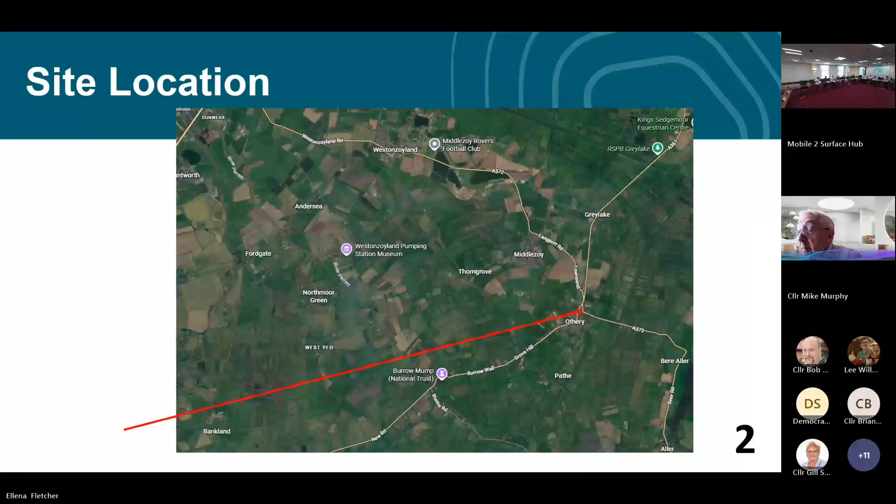So this shows the site location plan, with the site outlined in red. We're on the northern edge of the village.

The proposal extends into two fields, one of which was previously partly developed to provide an affordable housing scheme some 10 years ago, known as Peppard's Close. We've got existing residential development on the southern or western sides, and an existing farm complex on the northern side.

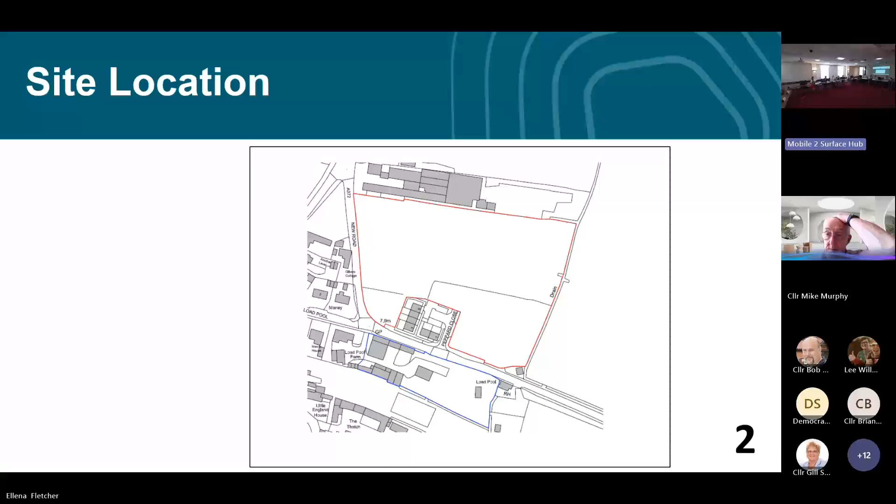This is an outline application with all matters reserved except for access. So this is just an illustrative layout plan, not fixed, just to give an indication of how the proposed development could be accommodated on the site. Access is a matter we are looking to determine at this stage, and it's proposed on the western boundary of the site onto New Road.

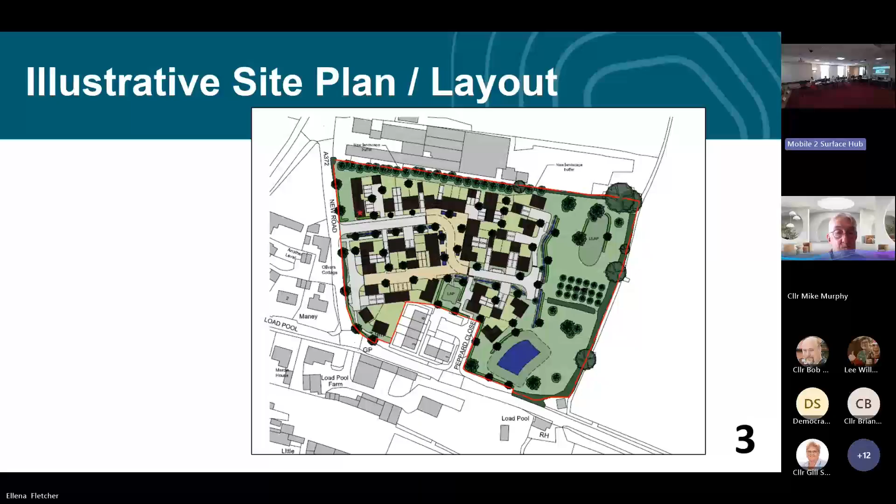As part of this application, footway connections into Peppard's Close are to be secured, and some of the land on the eastern edge of the site falls within an area of high flood risk, so that would be looking to contain drainage features and some of the proposed open space.

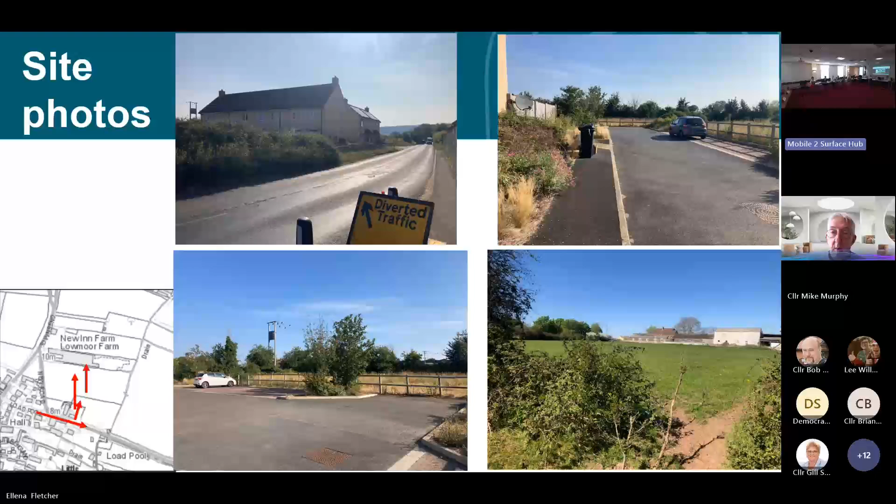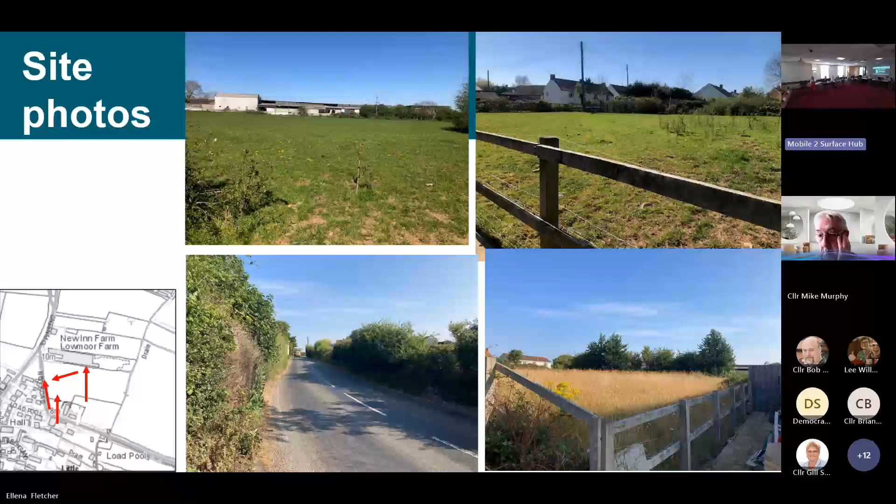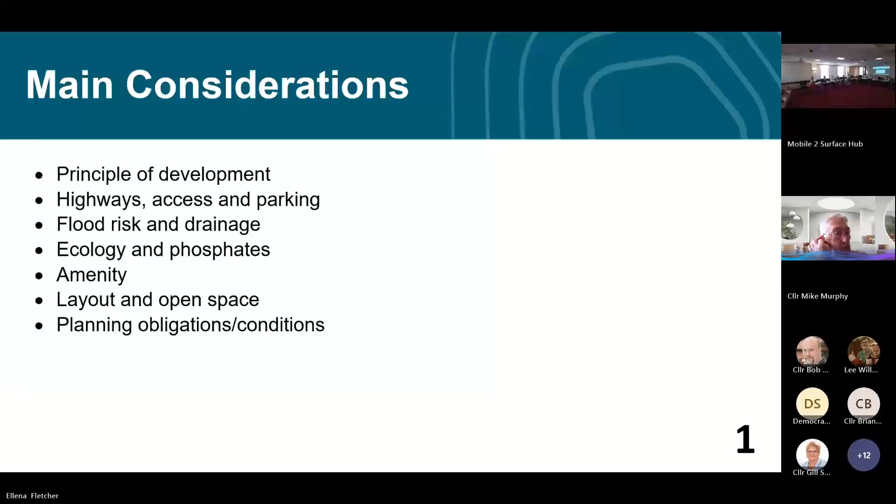In terms of principle of development, so Othery in the Sedgemoor Local Plan is designated as a tier 4 village. This is a site outside the settlement boundary for Othery, but lies adjacent to it. The relevant policy, T4, says that schemes for affordable housing can be acceptable where there is evidence of local need in such locations - that's the standard policy basis when looking at tier 4 villages.

That's predicated on there being a housing need, and in this case there is an up-to-date housing needs assessment from 2024 that identified a need for 12 affordable rented units. Home finder data from 2026, and more up-to-date data that our affordable housing colleagues have extracted from the system, indicates that need is now increased to 22 households. In addition, they consider there to be a likely additional need for intermediate housing - things like shared ownership housing products.

So this scheme will provide 40% affordable housing, equating to 16 units, which will make a meaningful contribution to meeting that local need identified through the housing needs survey and on the home finder register.

In terms of the policy position, the policy allows affordable housing schemes to come forward, and they can be cross-subsidised by market housing where justified by viability evidence - that's the standard process for tier 4 villages. We're not in that scenario here; we haven't had such evidence submitted. In that regard, there is some conflict with the policy because that's what the policy requires.

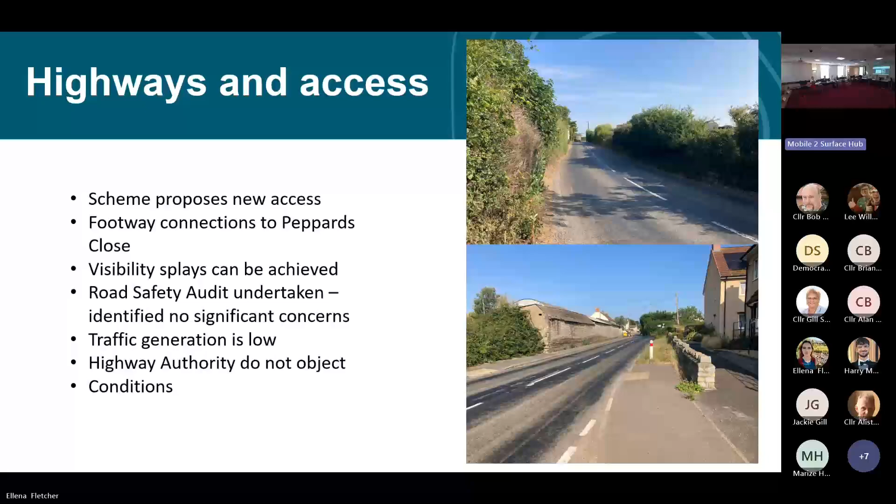They are seeking conditions to secure the footways I've mentioned in terms of that internal connection, visibility splays, drainage, estate roads and construction management to manage the effects of the development, and the need for a Section 106 agreement to secure a travel plan. Now, subject to those measures, we consider the proposal delivers a safe means of access for all users and is considered policy compliant.

Statutory consultees have had detailed input on the application, including the Environment Agency, Drainage Board and Lead Local Flood Authority, and they are not raising any objection. So on that ground, subject to securing conditions they've requested, which include that all accommodation must at least have a second storey, specifications about finished floor levels and detailed drainage, there are no objections regarding flood risk and drainage, and we'd consider that part of the scheme acceptable.

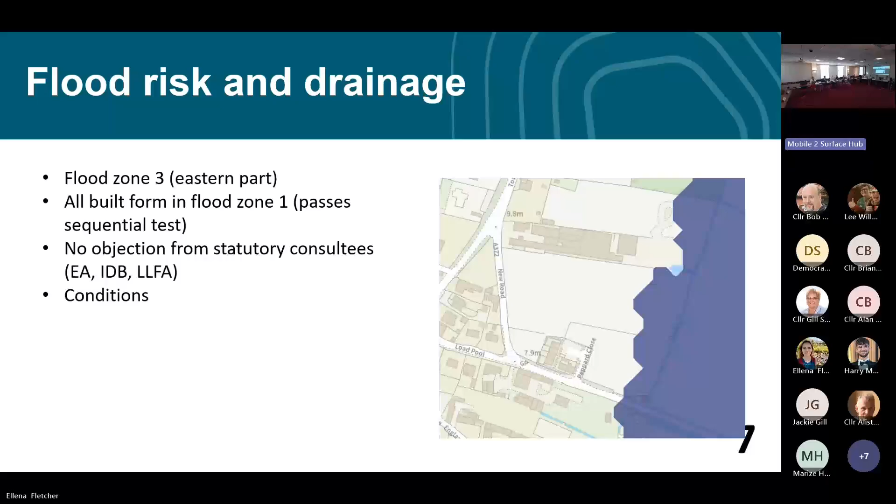Coming on to ecology and phosphate matters, the site does fall within the catchment of the Somerset Levels and Moors Ramsar site, which is affected by phosphate pollution, which members will be very aware of. However, the scheme can connect to the existing mains drains in the locality, which discharge at Chilton Trinity Treatment Works, downstream of the Ramsar site, and therefore impacts on the Ramsar site can be screened out, with no requirement to undertake a habitat regulations assessment.

The scheme's been subject to detailed ecological surveying with lots of input from the Somerset ecologist. It can meet its 10% biodiversity net gain objectives, subject to securing this through a Section 106 agreement, but again, subject to securing the mitigation and conditions proposed, we would consider the scheme to be acceptable in that regard.

I just want to touch on amenity considerations, particularly in terms of noise and odour. The application has been accompanied by assessments.

In regard to noise assessments, that's looked at whether potential local sources of noise, which would be either road noise given it adjoins an A road, and farm noise arising from the agricultural enterprise located on the northern boundary. In terms of road noise, it's identified as low risk category requiring a modest level of intervention in terms of building fabric, so improvements that could be made to mitigate noise arising.

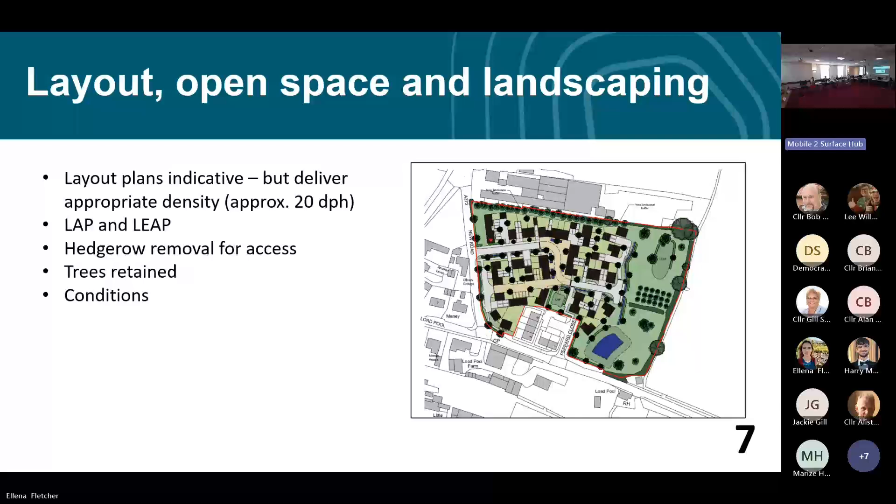So again, the scheme is considered acceptable subject to securing those conditions, securing the obligations for the lap and leap, and the tree protection measures. And then just trying to wrap it up.

In terms of other matters, planning obligations - NHS Somerset recommended a financial contribution towards nearby GP provision. Just wanted to give a quick update on that from what was in the report. We received a revised letter from NHS Somerset; they changed their methodology for the calculation, so the figure quoted in the report is slightly different from what they're actually seeking. It's actually gone up by about 2,000, so instead they're seeking 23,167.

If members are minded to approve, it would be looking for that higher figure, and that's been accepted by the applicant. We will look to secure that through a Section 106 legal agreement. Just in terms of other conditions, I mentioned a local labour agreement condition will also be imposed on the permission given the size of the site.

So in terms of wrapping things up, planning balance and recommendation - there is conflict with the local plan in terms of policy T4. We've got to consider that in the round in terms of the council's inability to demonstrate a 5-year land supply, which is currently at 4.17 years.

Now there is 40% affordable housing proposed, and that does attract substantial weight. We consider the site is well located; it represents a logical extension to the village. It isn't going to extend out into open countryside, given the containment within existing residential development to the south and the agricultural complex to the north.

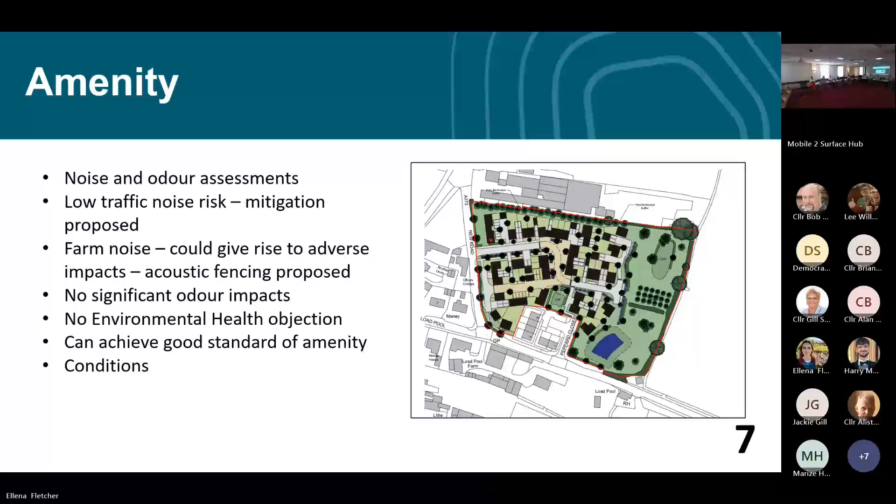So that takes us on to planning applications 5 and 6 for Bridgwater Docks. Agenda item 5 is for the planning application itself, and agenda item 6 is for the listed building consent. But we'll be taking the two together so that we don't have two very similar applications presented.

Okay, thank you. Good morning, everyone. So as introduced, this is a presentation on a full planning application and a listed building consent for a suite of regeneration works at Bridgwater Docks.

Including the change of use of the dock to introduce residential and leisure moorings and associated infrastructure, including new secure entrances and pontoons, creation of an active travel route, replacement of the swing bridge, repairs to the bascule bridge and associated structures, landscaping and public realm works and engineering works within the basin.

So the applications are before committee because the applicant is the council, and that is the only reason.

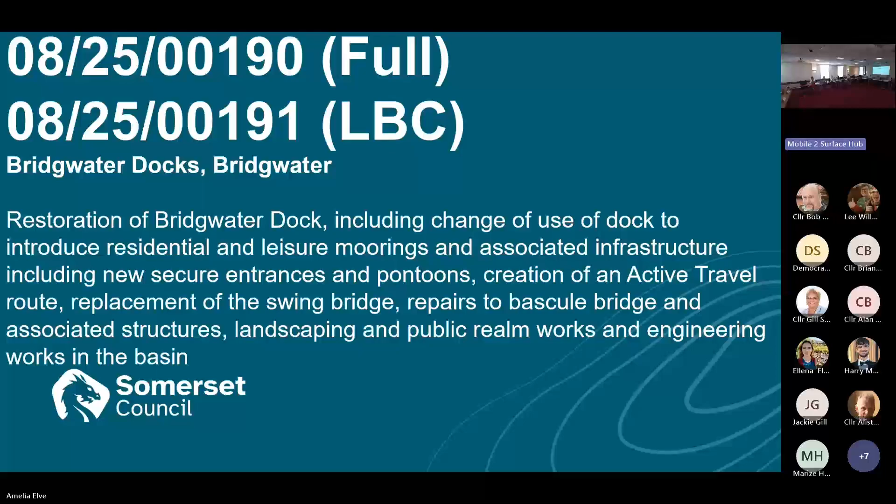Since the publication of the report, there has been an amendment to condition 19 following on from a late response from the Canal and River Trust. They just wanted to ensure—oh, I've just realised it's not loaded on the screen, sorry. I will slow down a bit.

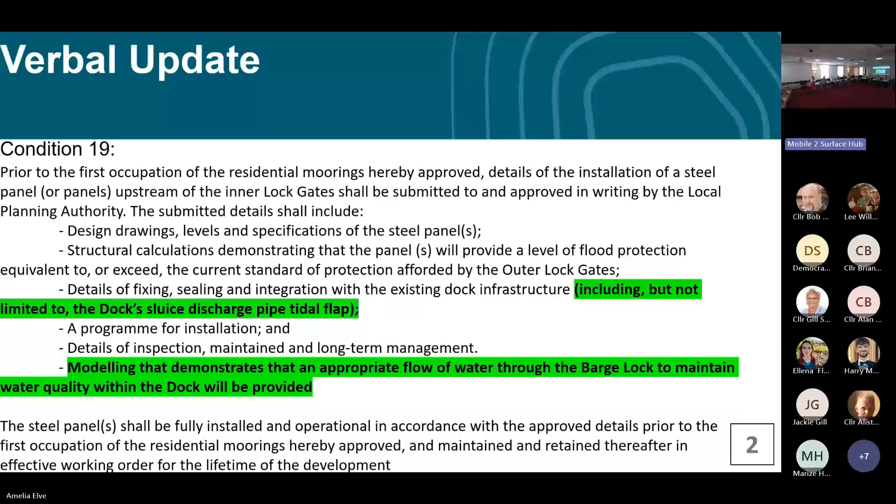So condition 19 is to be updated to reflect the latest response from the Canal and River Trust, and that's just to ensure that the steel plating that would be used as a stop loss strategy, which I will come on to, also includes other measures that meet the satisfaction of the Canal and River Trust, as well as the Environment Agency, who had originally requested this condition.

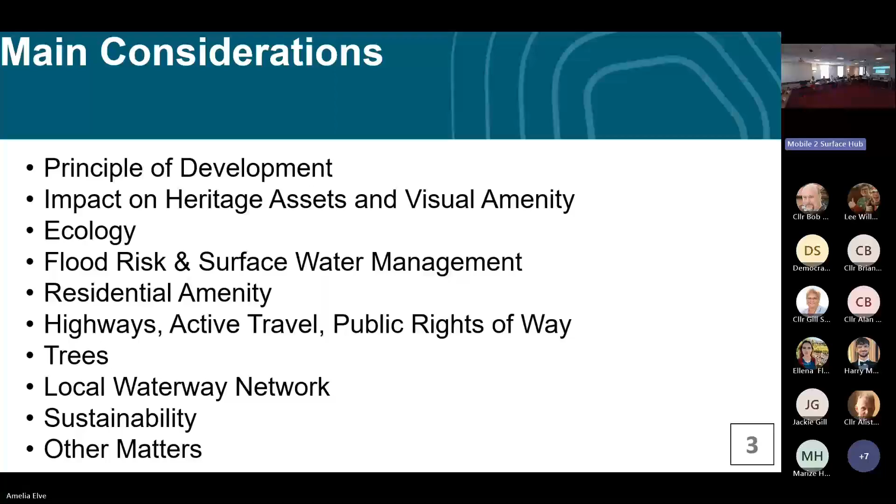The different additional document for this one is the Bridgwater Vision 2015, which is specific to regeneration works that are within Bridgwater, such as the Celebration Mile, which is the route from the docks down to the train station.

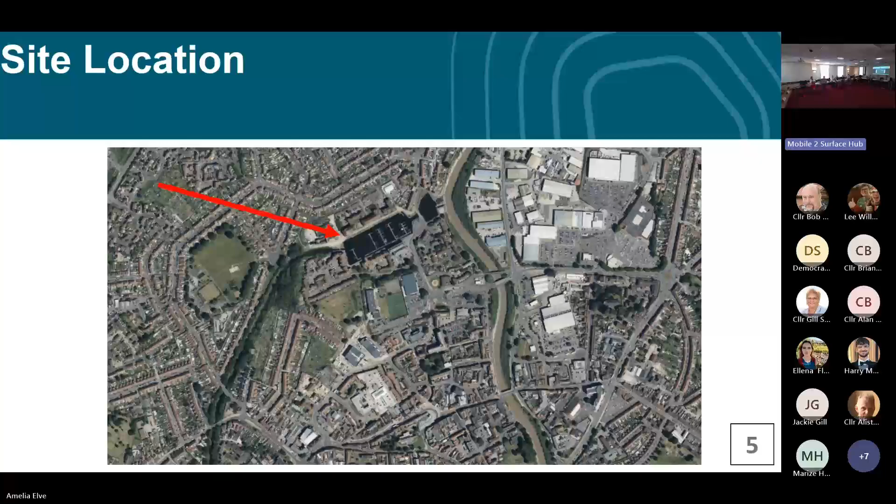The north, south and west sides of the dock are fronted by modern residential apartments with a historic warehouse on the south side that has been converted to a pub, Admiral's Landing, at ground floor.

The site extends to approximately 2 hectares and includes the Bridgwater Dock, a small section of the Newton Lock, which is the bit that you walk over just in front of Bowering's Mill, and the Sea Lock, which is to the right on that drawing.

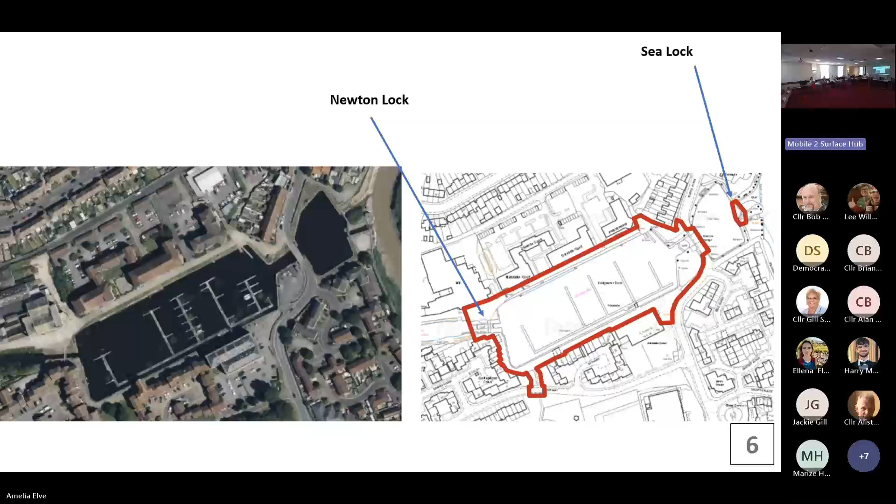So the scheme was presented to Quality Review Panel back in August as part of pre-application discussions. The key comments made by the panel identified that this is a major opportunity with potential to generate significant public benefit, that there's been a good engagement strategy undertaken by the applicant team, and that a strong council-backed vision is needed to identify priorities and choices for wider public benefit.

The restoration of the moorings and swing bridge should be prioritised as these can generate income. Public realm improvements should be focused on key entrance areas because obviously there's a budget, so it's about where to target the best bits.

And brick would be a preferred material with selected areas delivered at a higher quality type of material, to reflect the industrial heritage of the site and the wider Bridgwater industrial heritage.

So I've done it a bit different this time. I've done pictures and then plans to show what is proposed for that section of the site, because as you can appreciate, it's quite a large site.

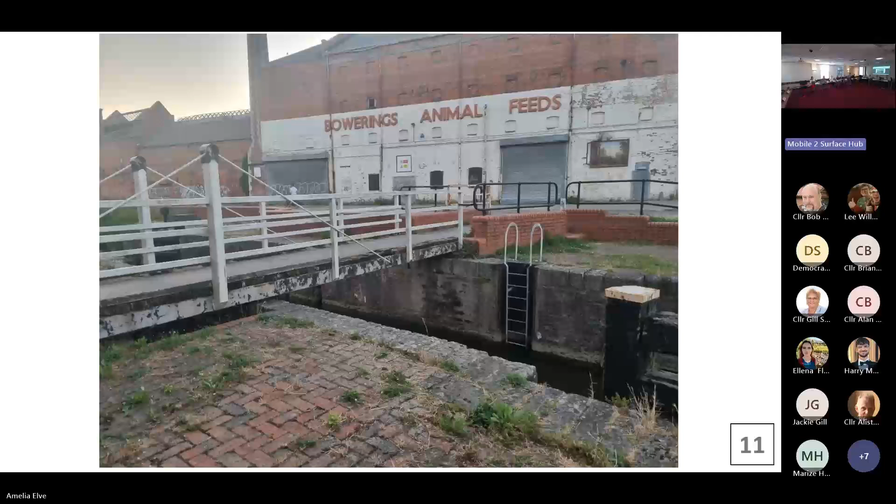Currently this bridge, for those of you who are local, when you walk on it, it moves down and it's quite narrow. This is the bridge that is proposed to be replaced.

So for that section of the docks, which I've effectively walked you through, this plan shows the proposed works for that section, from the crossing with Anson Way to the south, along the western and northern edges of the docks.

The proposal sets out that as you enter the docks from the footway, there's a new seating area. It's quite hard to see on these plans because they're so detailed, but these little brown rectangles are effectively new seating areas, and the cast iron wheels will be relocated as well. The blue asterisk indicates the siting of a gateway feature, such as an artistic sign or sculptural feature - details of that are yet to come forward, so it's just indicating where that could go in the future.

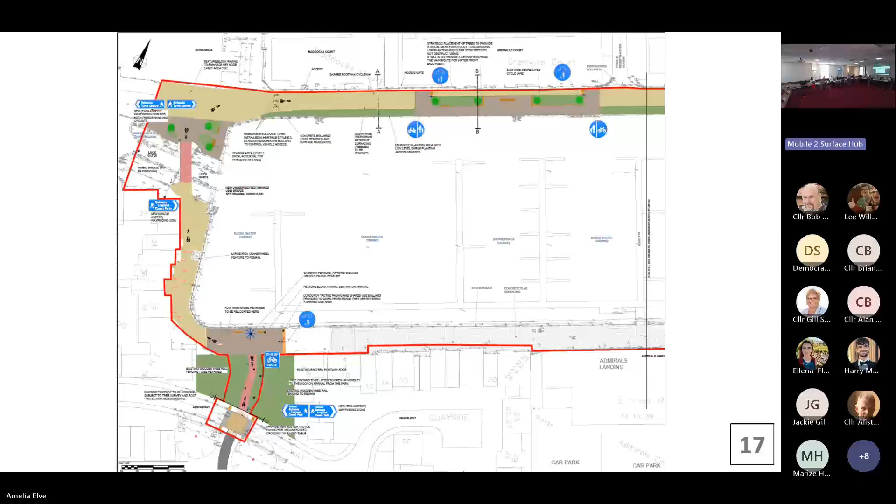So this is a more zoomed in plan of the widened footpath. This orange section shows where it would be widened to. A cell web material is proposed under the surface to ensure that the tree roots are protected, and this proposed methodology has been reviewed by the arboricultural officer, who is satisfied with this approach.

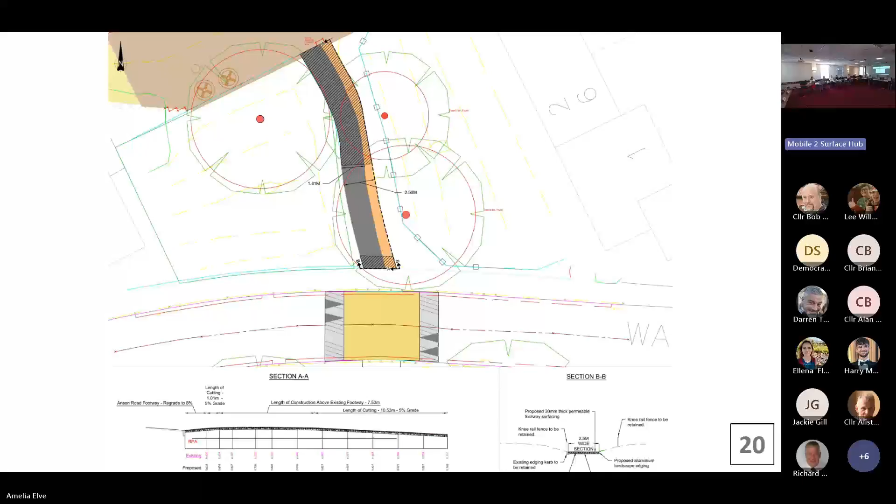So these plans show in more detail the proposed replacement swing bridge. The proposal would have a 3.5 metre wide deck to allow better access for both pedestrians and cyclists. I don't know if anyone here has walked along the swing bridge, but at the moment you effectively have to let people go one at a time, and it's quite awkward.

And also the condition of the bridge isn't great, so the works are there to not just improve access, but also repair effectively what is currently there. It's quite similar in appearance to what's currently there.

So the proposal includes the heritage style railings to the edges, and this has been reviewed by the conservation officer, who is satisfied that these plans are acceptable. There's quite a number of conditions to secure the finer details of these materials because of the historic environment, and there's quite a lot of protected heritage assets in this area, but again, we'll come on to that later.

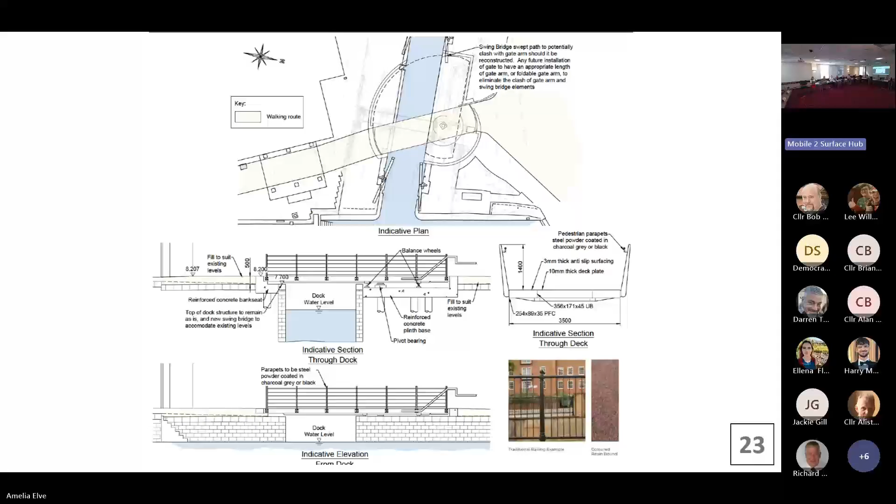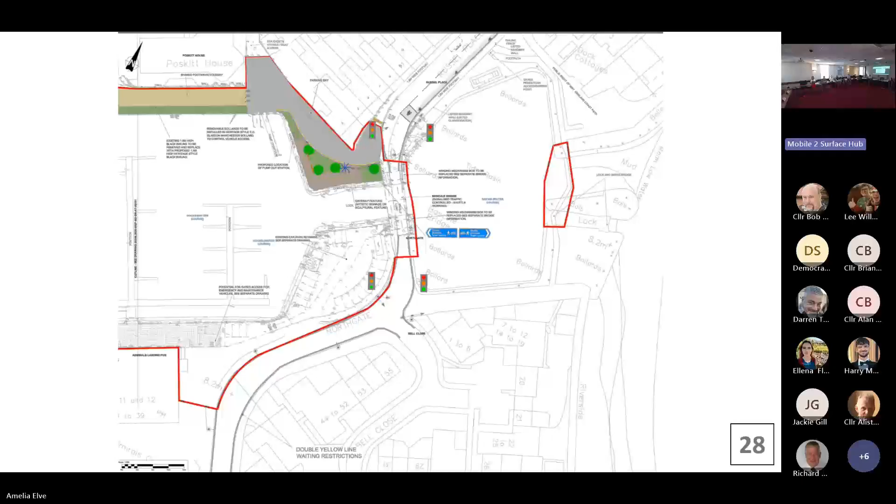So the winding mechanisms are proposed to be covered with glazing to allow for viewing, and there would also be a continuation of replacement black railing with the 1.4 metre high heritage style, along with refurbishment works to the Bascule Bridge.

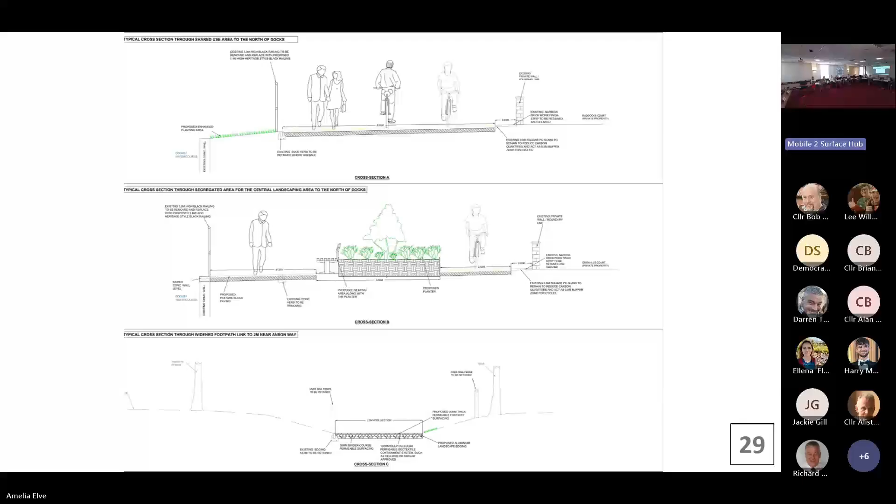Another reason is that the planting has to be provided a certain distance from the edge of the docks, to prevent roots from impacting the structural integrity. The LLFA requested that, and they're now happy with where the planting is shown.

So we move on to the pontoons. These are effective T-shaped structures, and the scheme seeks to reinstate one of these T-shaped structures that's been removed historically. Previously, those local to Bridgwater will know the docks were used to allow for houseboat moorings. So the scheme is changing the use of the docks to allow for residential and leisure moorings, which provides an economic benefit as well.

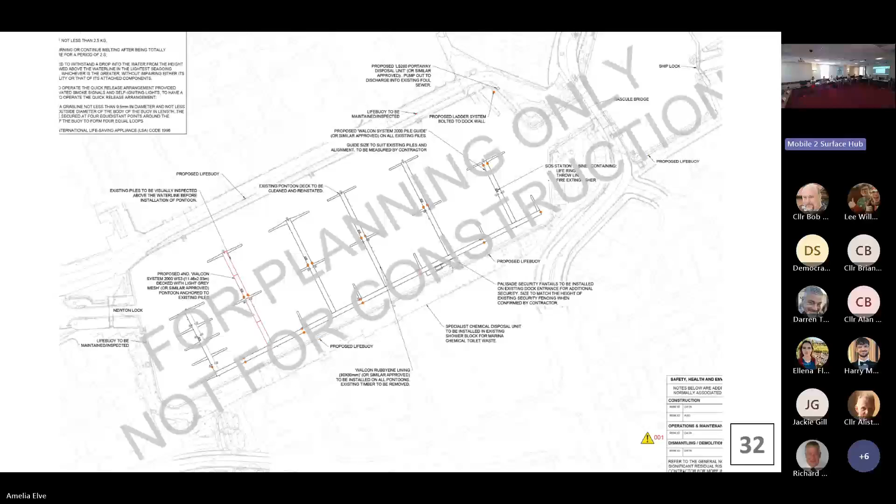Just another view of the pontoon. This plan shows which bits - it's quite hard to see, but this red section here is to be replaced, reinstated, sorry, as currently it's missing. There are just these piles at the moment standing out of the water, and historically there was a pontoon here, so this isn't new in that sense, it's just been missing for a considerable period of time. The existing pontoons are to remain in situ, so nothing is proposed to extend these, but they would be refurbished.

Once you've gone over the Bascule Bridge and look to your right, looking west, there's the Admiral Landing pub, this existing parking area, and this is the area proposed to have waste storage and cycle storage facilities to serve the boats. This is shown on this plan - the orange block is the bike shelter, and these multicoloured boxes are different recycling and waste facilities.

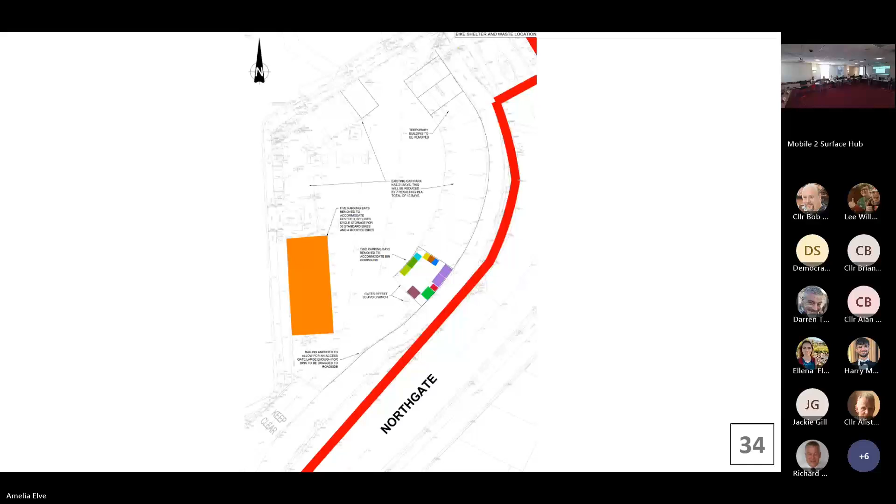Okay, so that's it for photos. We move on to the considerations of the scheme, first of all the principle of development. The Bridgwater vision, as previously highlighted, sets out specific projects required in order for the ambitions of the vision to be achieved, and project 3 within this vision focuses on the Docks Renaissance - that's the title given within this document.

Additionally, whilst not part of this application, the site is connected by pedestrian links to the brewery field and then the Northgate Yard scheme that was recently redeveloped to the cinema complex, and these are also identified projects within the vision. So what I'm trying to get across is that the docks form part of the wider regeneration aim of the town.

Furthermore, policy B18 of the local plan states that development proposals in the town centre will be supported that deliver high quality public realm improvements, whilst taking into account important views of and to landmarks, and integrate the town centre with the wider town through improved connections and linkages. The docks are not strictly within the town centre boundary - they're 9 metres from it - but they are considered well related, and given the works relate to public realm improvements to an important landmark and seek to improve connections to and from the town centre, it's considered B18 is a relevant policy when assessing this application.

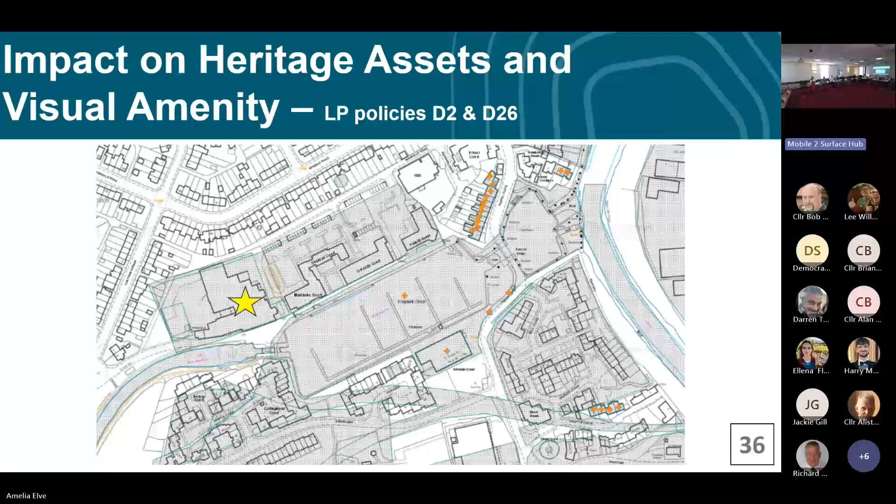Historic England were consulted on the application and stated they were offering no advice, defaulting effectively to the council's conservation officer. Initially, the conservation officer wanted further information, due to concerns regarding a lack of clarity on the proposals because there were a few errors between the drawings that didn't match up. Following the submission of this additional information, the conservation officer is satisfied that the proposals would not in principle cause harm to the significance of the heritage asset, and that appropriate conditions could be used to secure suitable mitigation, such as a method statement, schedule of works, and details of fixtures and materials.

Considering archaeology, South West Heritage have raised no objection and have recommended a condition to secure a programme of works with a written scheme of investigation.

Moving on to other considerations of visual amenity: landscape and placemaking initially again requested additional clarification and amendments, similar to the conservation officer. Following submission of these revised details, she was satisfied that conditions can be used to secure a hard and soft landscaping strategy, details of materials and street furniture and fixtures - similar to the conditions requested by the conservation officer.

Moving on to ecology: the application site is within the buffer zone of 2 county wildlife sites. The buffer zone is a relevant constraint when considering major developments.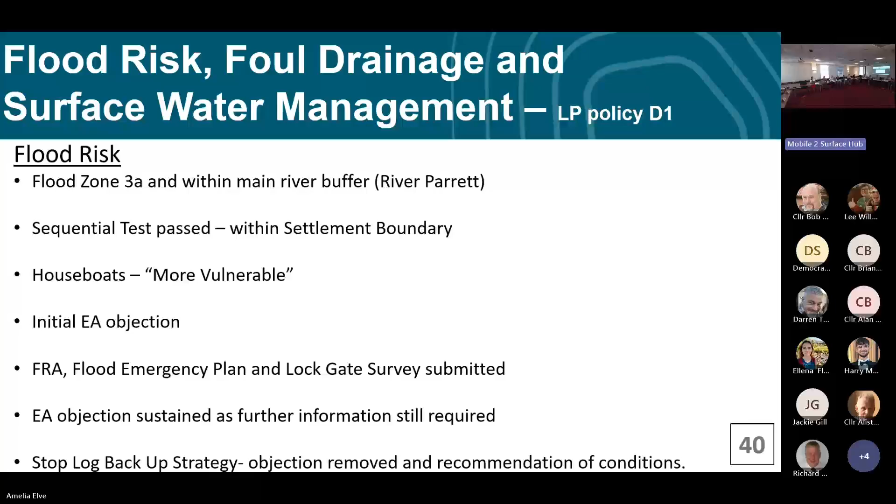In response to this, a stop log backup strategy was proposed. This relates to condition 19 that I provided a verbal update on at the beginning of the presentation. A strategy has been submitted, and effectively this would introduce a steel plate adjacent to the lock gates to ensure that in the event of failure, there is effectively a backup delivered by this steel panel. The strategy has been submitted and accepted by the Environment Agency, with the recommendation of condition 19 as you saw at the beginning of the presentation, and that has also been amended to reflect the needs of the Canal and River Trust.

Moving on to foul drainage. There's been a number of concerns raised by third parties regarding potential impacts if this isn't suitably managed for the proposed moorings. The scheme includes a foul water drainage plan, which indicates that a pump out facility is proposed at the northeast corner of the docks, with a proposed new connection to a chamber on the existing foul water pipe, with the connecting pipe from the new facility and other relevant details to be agreed with Wessex Water.

The Environment Agency have also commented on foul drainage and advised that they have not identified any issues with the proposal, and that the connection to the foul sewer is subject to agreement with Wessex Water. An informative has also been provided to remind the applicant to engage with Wessex Water. The scheme also includes a provision of a specialist chemical disposal unit within the existing marina shower block for chemical toilet waste. It's therefore considered that the scheme is acceptable in respect of foul drainage, with a proposed condition to secure a suitable foul drainage connection prior to the occupation of the residential moorings.

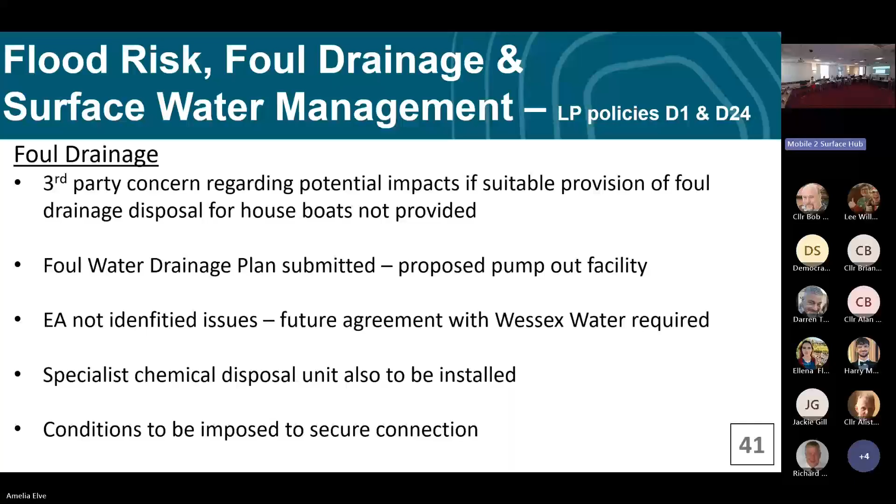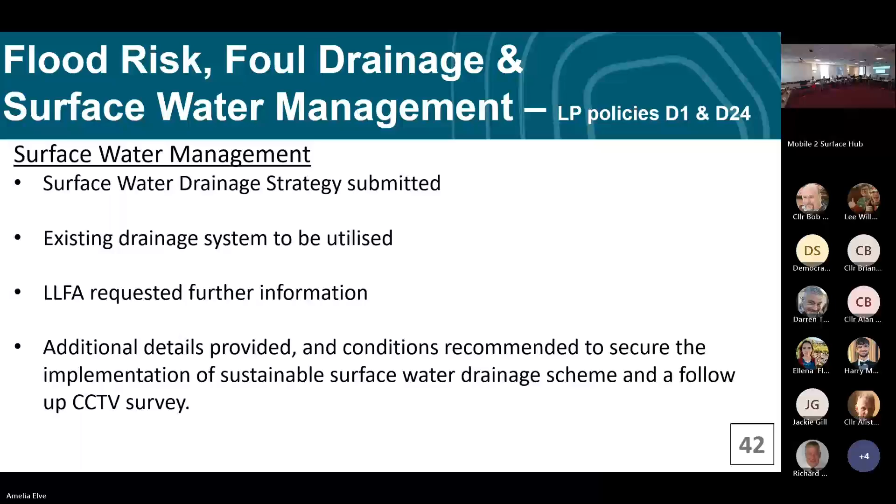Surface water management: a surface water drainage strategy has been submitted, setting out that the proposals do not impose a meaningful increase of the impermeable area, because you're effectively replacing, not quite like for like since they are different materials, hard standing with different hard standing. The works would connect to the existing drainage system with overland flow routes to the docks in the event of exceedance. Initially the LLFA wanted further information, and this has been provided, and they're now satisfied, recommending appropriate conditions to secure the drainage scheme, and a CCTV survey to demonstrate that the existing drainage systems are of an acceptable standard to allow for suitable drainage.

Environmental health have also been consulted on the scheme, raising no objection, recommending suitable conditions to secure a CEMP to protect residents during the construction phase of the scheme, appropriate lighting to ensure that lights aren't directed towards residential properties, and also the standard land contamination reporting condition.

In respect of the amenities of future residents, so those that may wish to take up the moorings, the scheme is considered to be in a sustainable location, an appropriate distance from local amenities, and therefore is considered to be an acceptable place to support a good level of amenity for future occupiers.

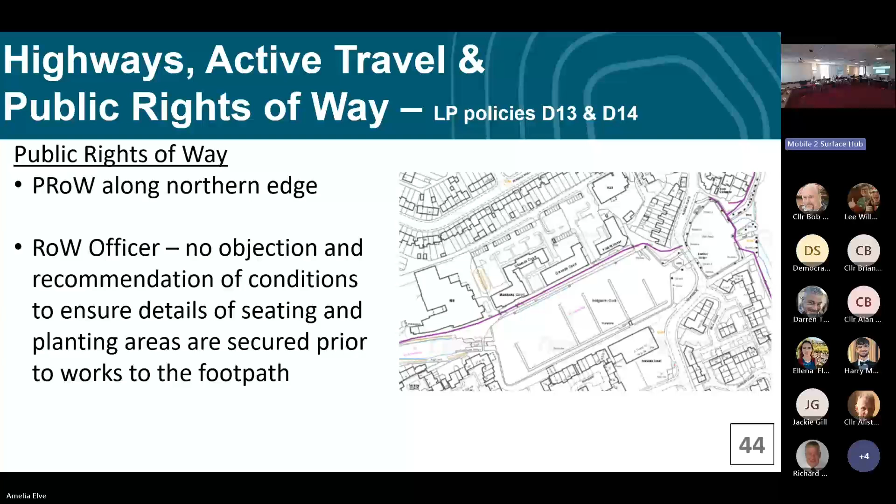Moving on to highways - appreciate it's not a car scheme, but highways still need to be involved because of the types of structures that are involved and the active travel links. Initially there was a request for additional information. This has been provided, and following on from this, there was a recommendation of conditions to secure the relevant approvals for the swing bridge, a construction traffic management plan, and a road condition survey as well.

Moving on to active travel. Initially concerns were raised regarding the proposed layout, summarised as needing to cross the pavement when entering and exiting Anson Way. There was a suggestion to provide entry and exit slips on the approach for users travelling along Anson Way - just a reminder, that's the road to the south that the widened path is going to connect to. They also suggested that the path should be widened further, and that the segregated cycle lane along the northern side of the dock should be widened, with a preference for shared space throughout.

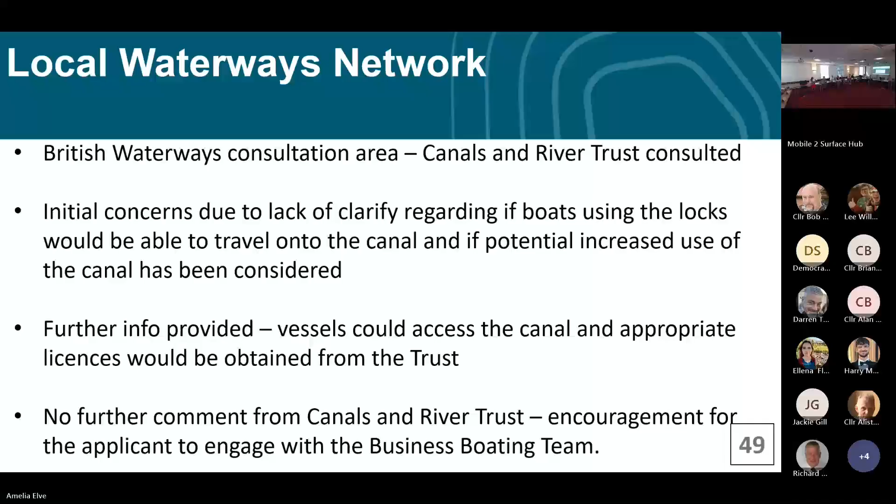Quickly on sustainability, the Environment Agency and Environmental Health both recommended conditions to secure a construction environment management plan, including the management of waste during the construction phase. A sustainability statement has also been submitted, setting out that durable materials are to be sourced from the UK and Europe to minimise carbon footprint, recycling facilities to be provided to manage both construction and operational waste, and reuse of materials where possible. A suitable condition is proposed to ensure the development is carried out in line with this statement. The submitted site plan also demonstrates that recycling facilities would be provided to serve the moorings.

Just a brief summary of some third-party concerns. Some of these aren't material planning considerations, but given the nature of the concerns and the application, I thought it worth summarising here. Concern has been raised by the Sea Cadets that the proposals would prevent their continued usage of the site. It's understood that the Sea Cadets use the docks currently under an informal agreement, and the proposed works are not considered to significantly impact the space available for those activities.

The reinstatement of the pontoon is further down the docks, and as set out previously, historically there has been a pontoon here. Whilst the proposal would introduce an increase in activity and number of boats moored within the dock, there is a potential that the availability of space would be reduced if all those moorings are occupied. I've had a number of discussions with the applicant team, who I understand have also been reaching out to the Sea Cadets. The applicant team are willing to engage with the Sea Cadets to understand their needs, to create an arrangement going forward that meets the needs of both the Sea Cadet organisation and ensures a viable scheme that provides an economic benefit.

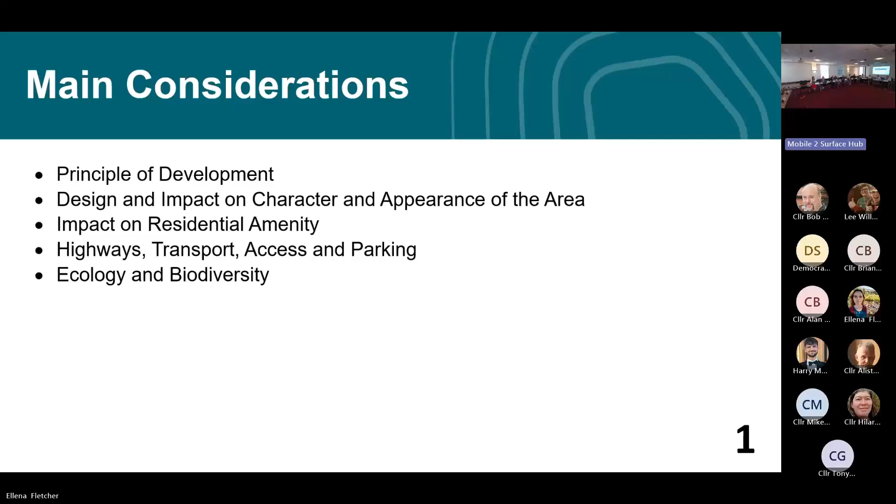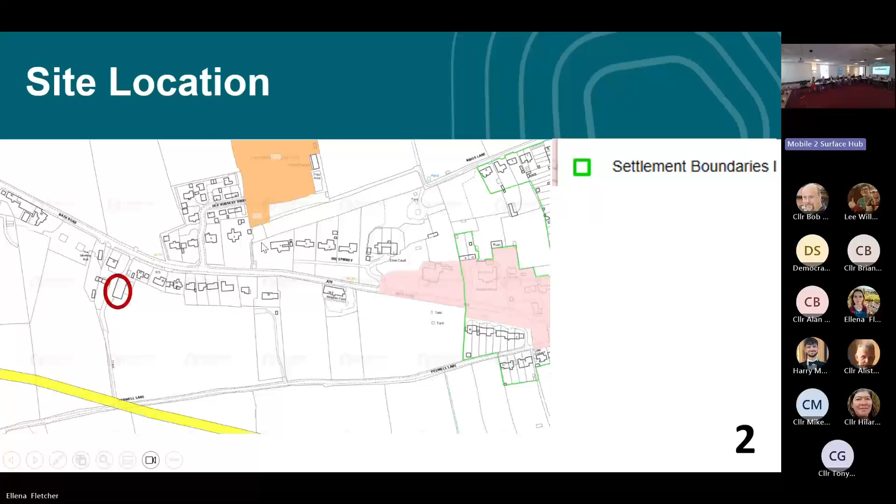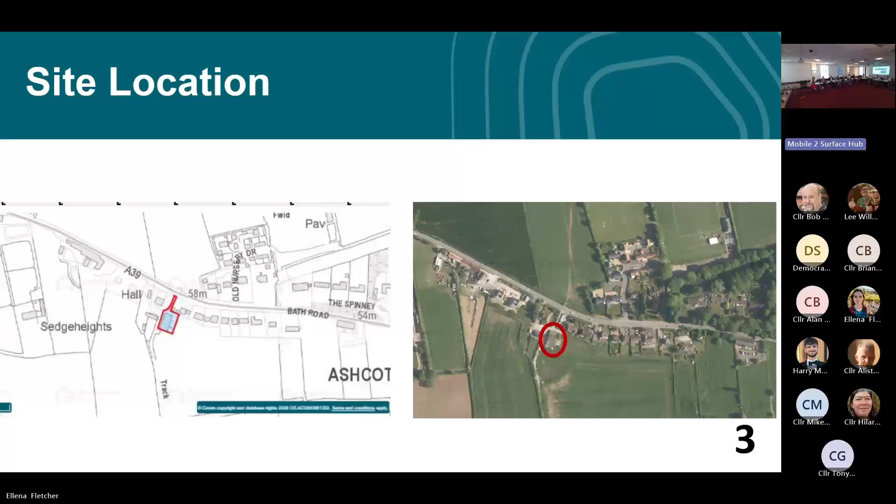Now I'll show you a couple of site location plans to give context of the site and surrounding area. The site currently comprises a large agricultural building, which has the benefit of a Class Q fallback consent for two dwellings, but that expires later this month. This application is not relying on that fallback.

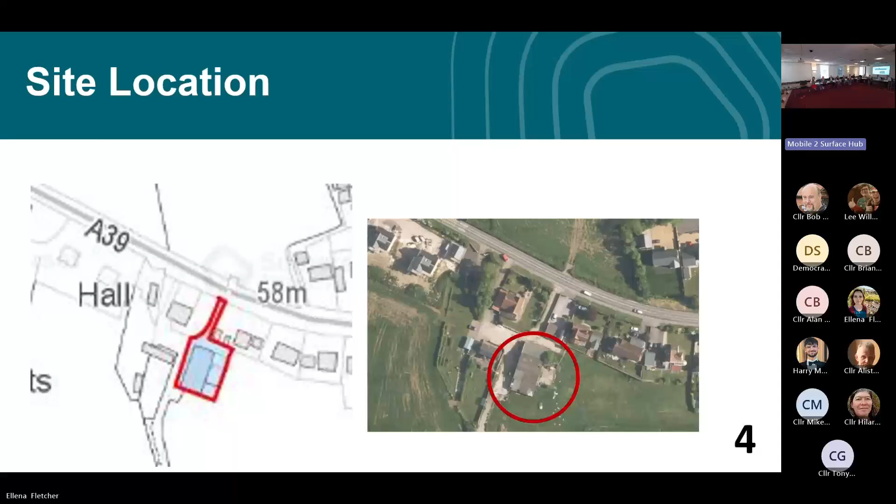This application is actually for two self-built dwellings. There are currently two existing accesses into the site. Surrounding the site, in connection with the ownership, is also the main dwelling together with its annex. There's a vehicular access to the west of this dwelling, and also vehicular access to the east, and this proposal seeks to utilise the eastern access.

It's proposed to erect two detached four-bedroom self-built dwellings. Each would have its own parking for three cars, with adequate turning to the back of the car parking spaces, and it would utilise the existing access.

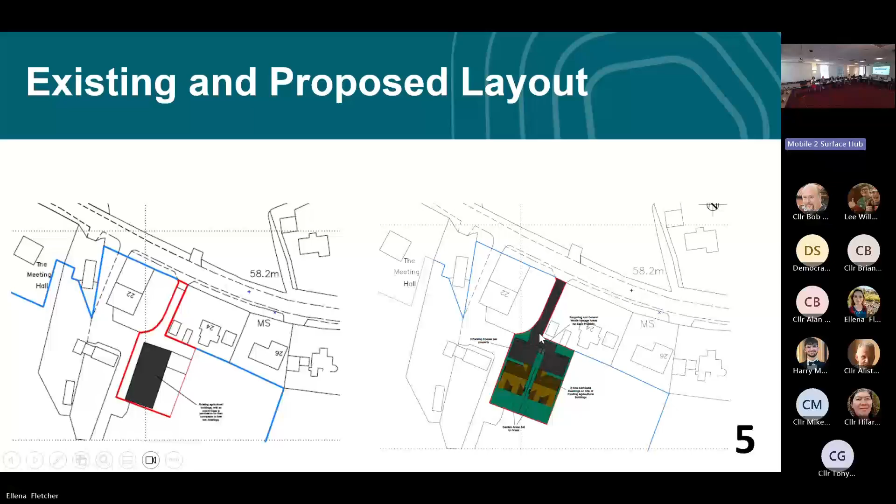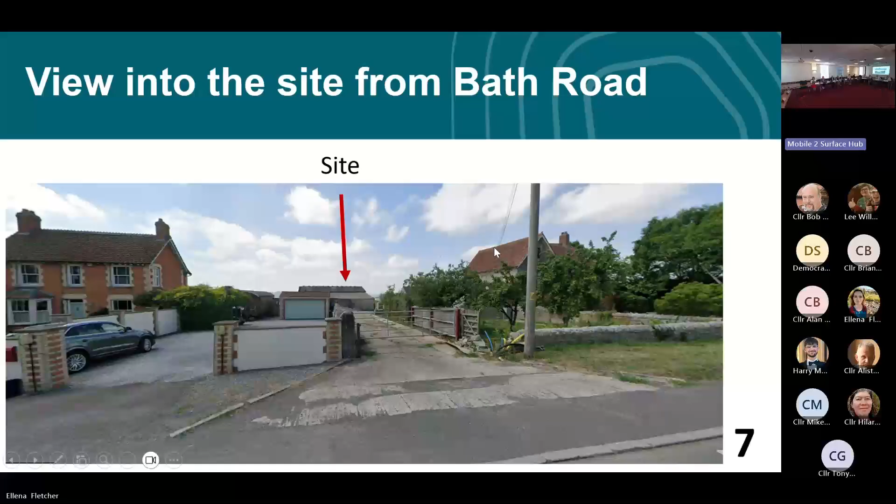This is looking directly into the drive off Bath Road. Presently you can see the existing agricultural building. Adjacent to the drive is the neighbouring property with its garage and outbuildings, and on the other side is a detached dwelling. This is looking in the same position but westwards along Bath Road, and this is the same position looking eastwards, showing the character of the houses within the street scene.

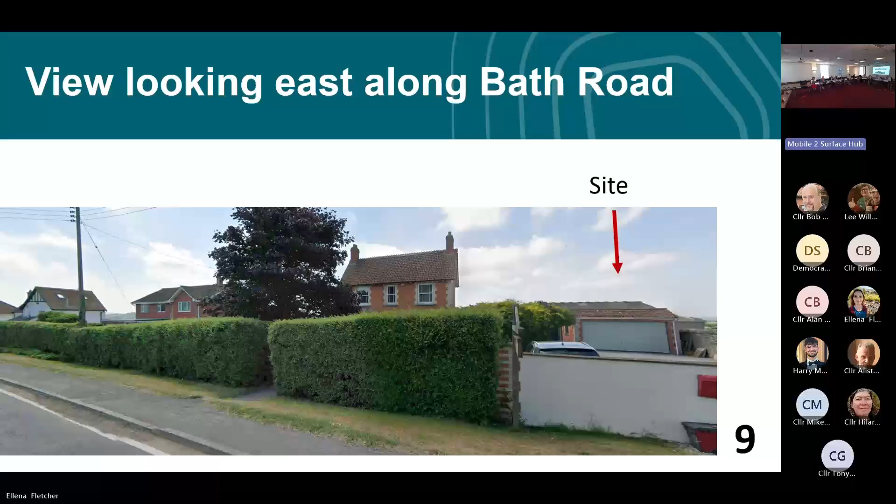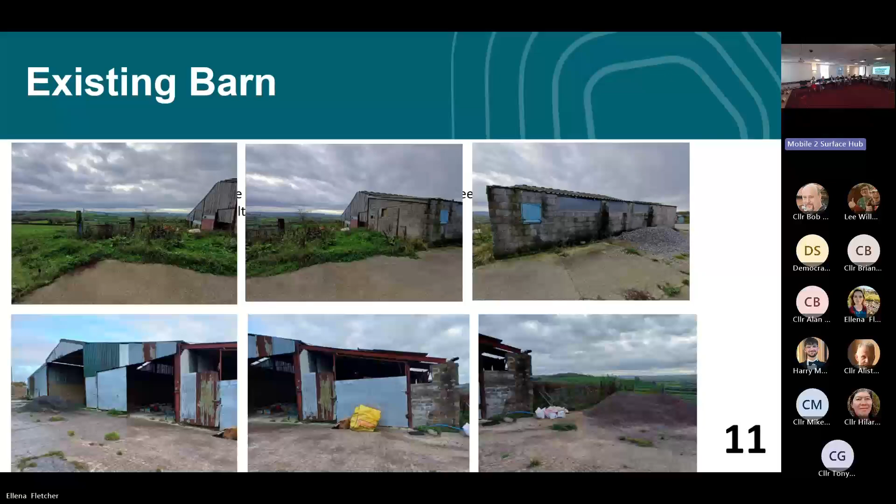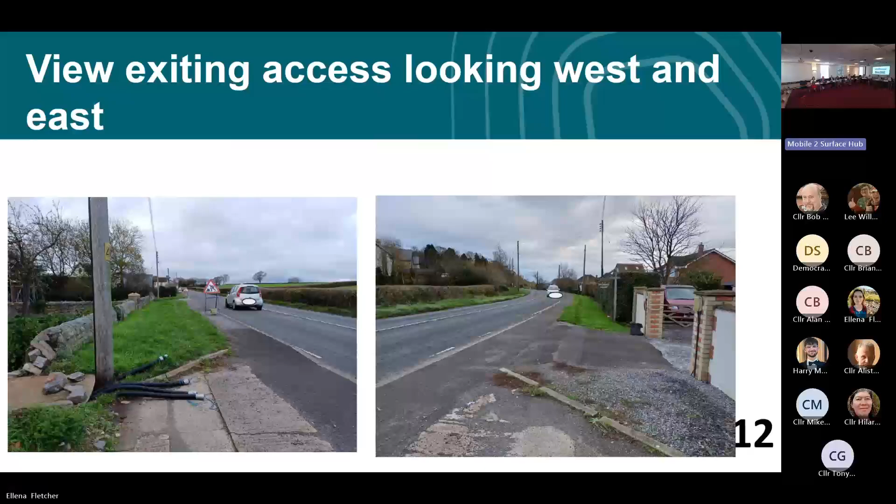In terms of the principle of the residential development, the application is for two self-built dwellings. Policies C02 and D9 of the local plan are relevant in respect of self-built dwellings. In this case, the site is not in an isolated location, but it is well connected to the village of Ashcott.

There is evidence of local need for plots within the village, and the applicants have a connection to the village, and they are on the self-build list. They've also been involved in the design of the dwellings, and it's considered that the principle of self-build in this location is acceptable.

In terms of design and impact on the character of the area, as could be seen from some of the photographs, there is a mix of character of dwellings along Bath Road, ranging from red brick, natural clay tiles, natural stone, some slate render, and red brick. There isn't a distinct character formed along the road.

This application seeks to provide two detached dwellings finished in red brick with tiled roofs. While the building is outside the settlement boundary, the buildings would be on the site of the existing large agricultural building, and it's considered there is an opportunity to enhance the character of the area. The buildings would not be set as far south as the southern edge of the agricultural building, but would be slightly further forward.

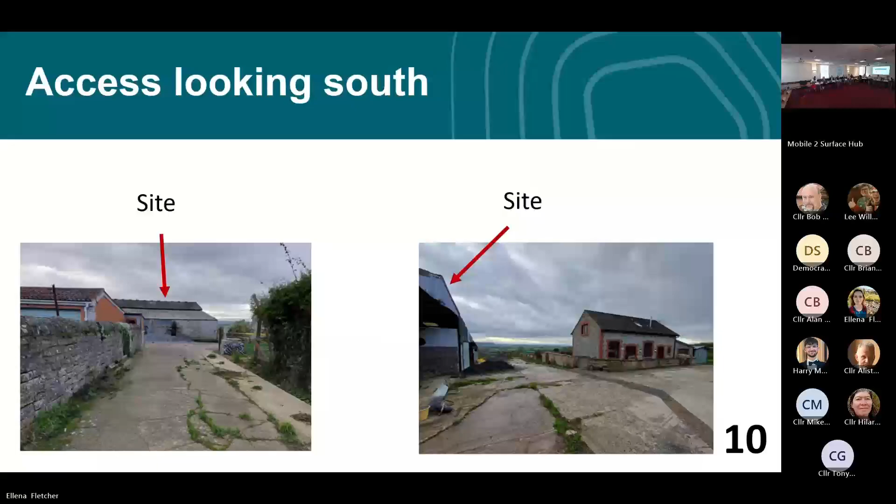Yes. Yeah, thank you. That's okay. I think one of the members will be quite happy they have chimneys. But all the other houses did.

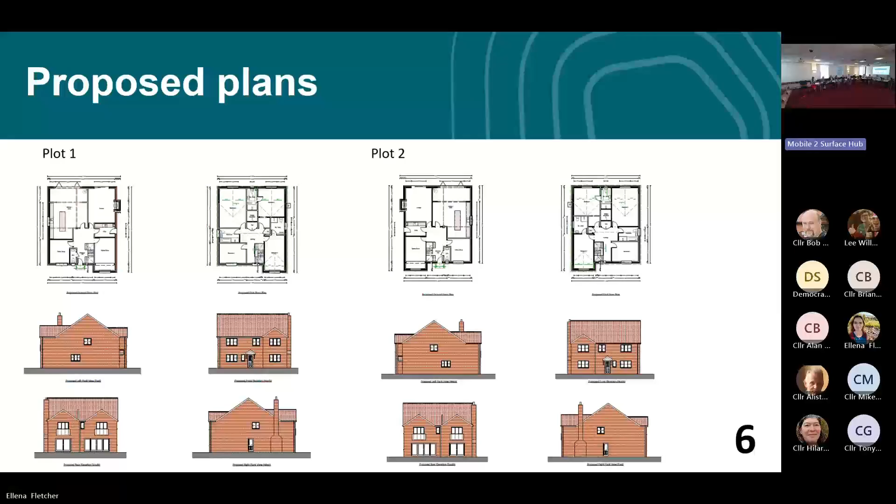So for this one, because it's outside of the settlement boundary, technically it's classed as countryside. Under the countryside element of it, we're satisfied that 2 dwellings just set back off the main road comply with the first bullet point of D9 in terms of it being appropriate to the scale and character. So we're not saying it's in the settlement boundary, adjacent to the settlement boundary, or necessarily well related given the separation distance, but it is accommodated for in D9 just a little bit further down from that sentence.

That really should go with the recommendation. Okay, thank you. Good question. Thank you. So we've got a proposal to move the recommendation to that. I've got Councillor Bradford, Councillor Hendry.

And how important the pre-app is. It makes so much difference when you come to these planning applications. They have a look at it. People talk to them beforehand. It's so much easier, I think, when it comes to council.

Councillor Hendry. Thank you, Chair. Everything I was going to ask has actually been covered, so. All right, thank you. Councillor Bolton, no.

Okay, thank you. So we've got a proposer and a seconder to agree the officer's recommendation. All those in favour, please show. And that is unanimous. Okay, thank you.

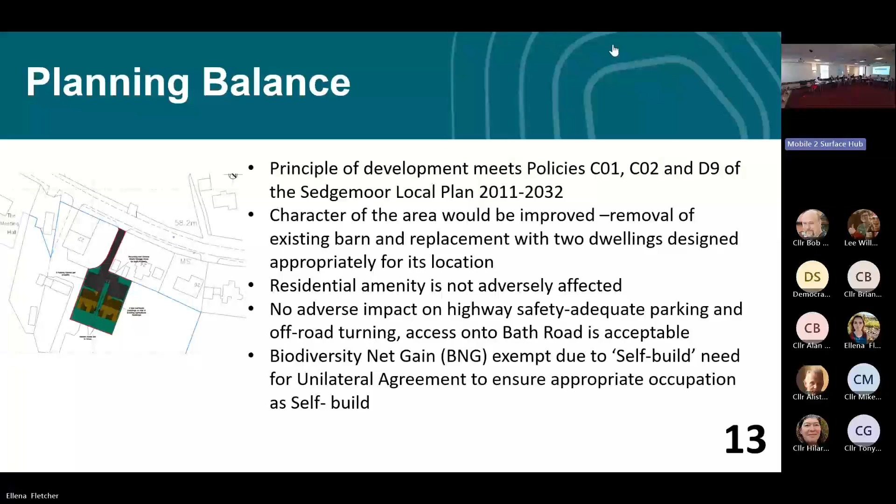Can I please now seek advice before we go into the next application? We have to finish this committee at 1 o'clock. We've got 30 minutes. I don't want to be seen to be rushing, but by the same token, we have a speaker on the next application who's probably been here all morning. If we get part way through the application and it's not complete, what happens at 1 o'clock?

Yeah, thank you. So for confirmation, the constitution allows you to have a meeting up to 4 hours, after which you needed to have started the last item to be able to complete it beyond the 4-hour window. Because we started at 10, technically that takes us up to 2, so you can continue, but we do need a lunch break. Yeah. So in that case, without further ado, let's crack on. Yes, thank you.

Yeah, so I'm taking the next application at Harborne House, on Church Lane in Compton Bishop. It's an application for the change of use of an existing annex into a holiday let and annex. So basically it's allowing a dual use for the current single use. The reason for bringing to committee is because my recommendation is contrary to the views of the parish council.

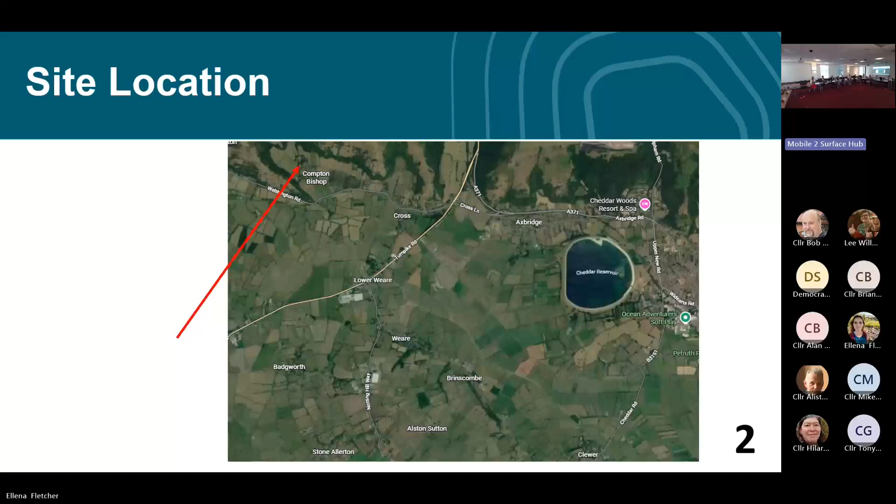Location, we're up at Compton Bishop, just in the middle of it's a very small settlement, just in the middle of the built form of the village. And the application site, this is Harborne House, where the proposal is. The existing annex is this one here.

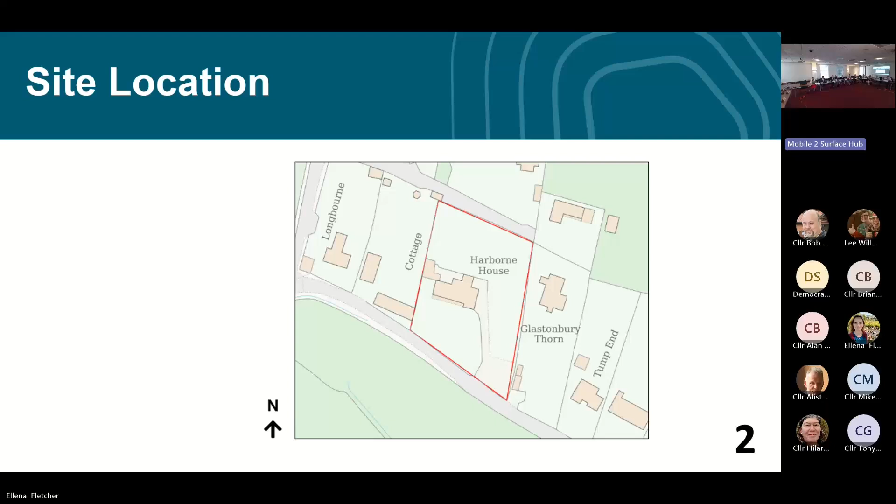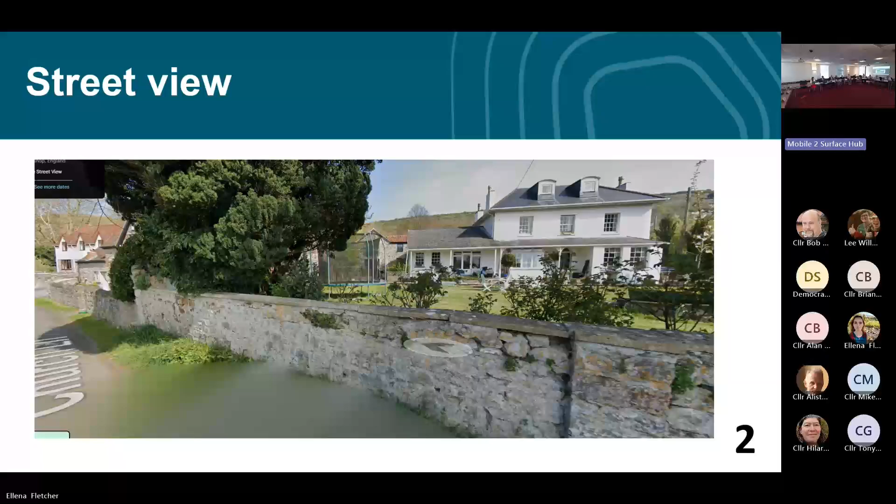So this building, I'll show you a bit more detail with the plans. This is the street view, just to get a bit of context. So that's Harborne House there. You can see the annex building. You can just about see this sort of pitched roof here, and that's along the boundary. The neighbouring property is just sort of obscured by this vegetation. There's a further neighbouring property which is a bit further down, which has relationships between these two, which I'll sort of touch on.

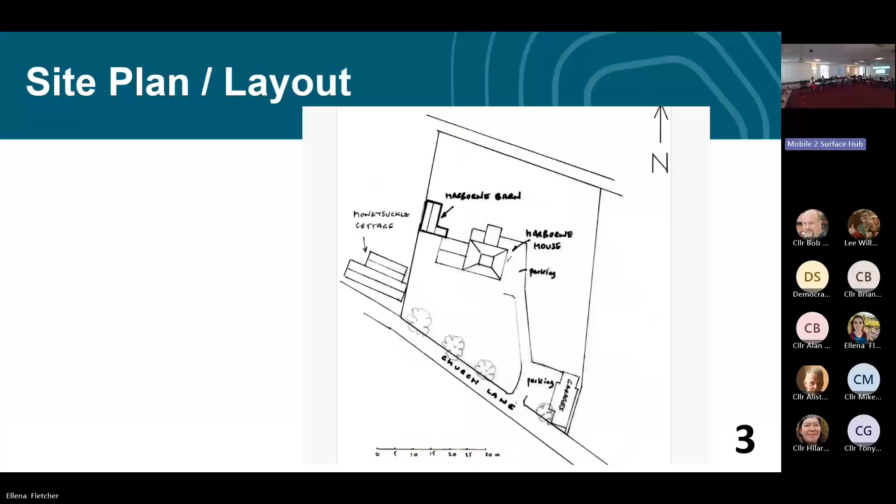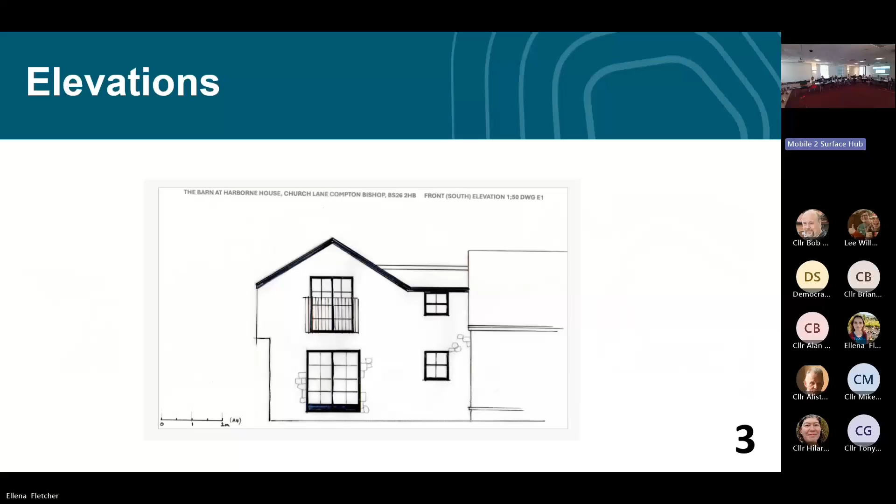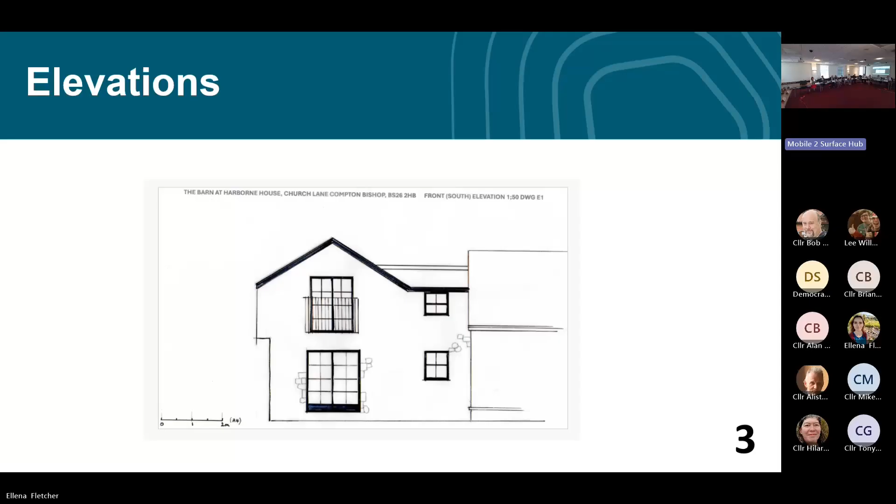There aren't any physical changes proposed to facilitate the use part of the application, but I will discuss the requirement for a privacy screen here in due course. Floor plans, again, these show that there's accommodation provided across 2 levels. We've got an open plan living area, kitchen, and then 2 and a bit bedrooms upstairs.

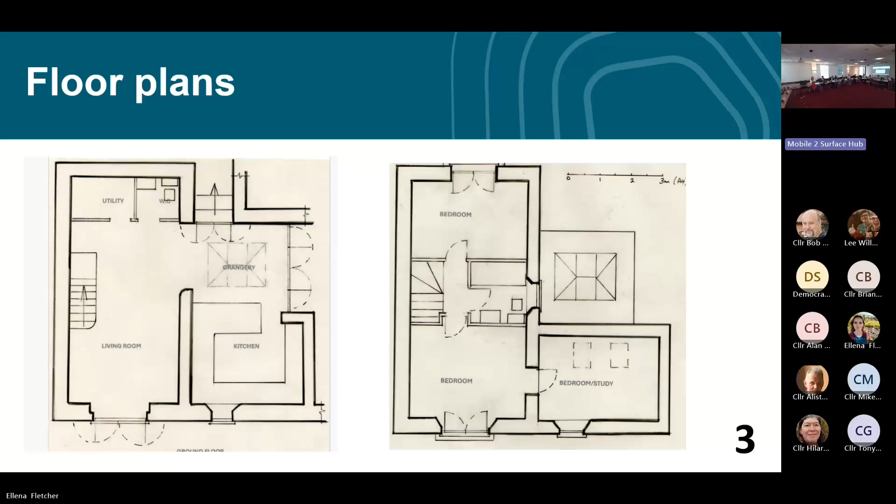So main considerations: principle of development, residential amenity, highways, parking. The site has an existing permission which allows the building to be used as an annex, dating from 2013. The annex was formed following an alteration and conversion of the existing building in that location.

I understand that the annex until recently has been occupied by a member of the applicant's family. They're now seeking more flexible use, either allowing it to be an annex or a holiday let, something that we've granted in other locations.

The site is in the village of Compton Bishop, which is not a designated settlement in our local plan, so it's in the area identified as countryside. It's also in the Mendip Hills National Landscape. We do have a tourism policy, which is the main test against which we assess applications of this nature. That policy says schemes in the countryside should be within or close to settlements.

So in that sense it's within a settlement, it does comply. It does, however, say that such schemes should be supported by a business case.

Some of the things we've had to consider as part of this application: the proposal does not involve a new built form in the countryside, and those applications can be more problematic. What we're talking about here is the reuse of an existing building which already has a lawful use. There was a business case which came in as part of the application.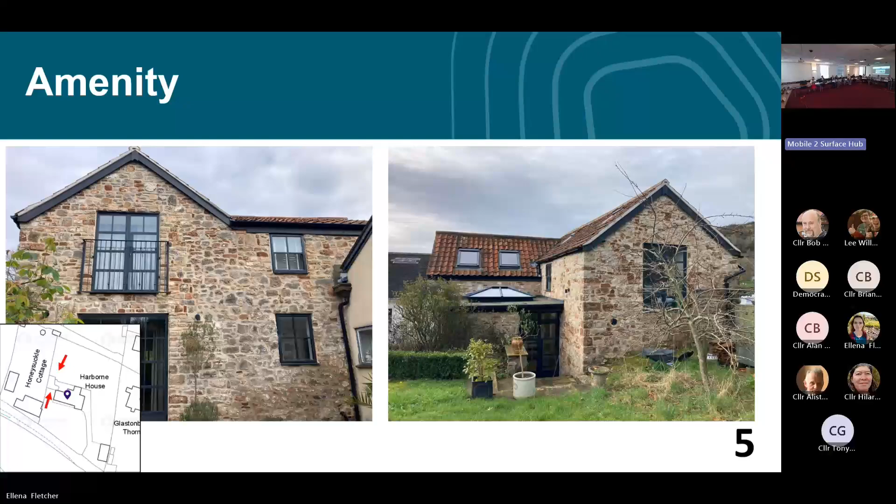Looking from within the applicant's garden, but looking towards the side, these two photos show the relationship between the two properties - that's again that balcony window. It is existing, and the views it has towards neighbouring properties. You can see on the site plan that building's there, and the neighbouring properties here.

An objection has been received from the neighbour regarding concern about amenity impacts, i.e. overlooking that could arise from the window that's here.

Now I'm mindful of the fallback position. This is the pre-existing window, which was approved under a previous application. But the previous permission did include a requirement for the installation of a partial privacy screen, across effectively the lower half of the balcony, and that hasn't been implemented. So that is an issue.

In terms of looking at the relationship, since the previous application was granted over 10 plus years ago, there has been boundary vegetation which has grown up between the two properties, and that has reduced opportunities for overlooking, and will also reduce the perception of overlooking. But nonetheless, we do consider that the privacy screen would perform a function and would help reduce that perception of overlooking. It is disappointing that it hasn't been delivered.

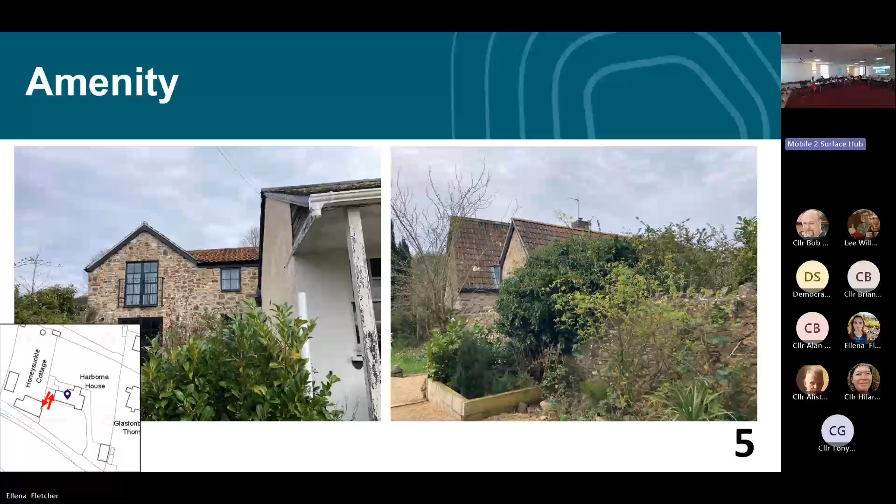So that's in terms of the relationship. I understand there's concern from the neighbour there, but we're partly dealing with the pre-existing situation, and the nature of the use, which is effectively lawful. It can lawfully be used for a form of residential occupation, and the holiday use is a form of residential occupation, so the impacts are going to be similar in order.

There's some other amenity bits I just want to touch on that have come up through the application process. This is something the Parish Council have raised in terms of concern about alleged leaks from a septic tank located at the property. You can see the property is a period property - as I understand it, it has a large Victorian era septic tank that drains, collects the waste, and drains under the road and discharges to a ditch. Now, the council knows that is not functioning as it should, and there is an issue there which the Council's Environmental Health team are aware of and are monitoring at the moment.

The applicant is in the process of replacing the tank, which requires building regulation approval. So in planning terms, we don't consider that the proposed change of use would result in a material increase in occupancy that would justify imposing a planning condition to require them to upgrade it. We're talking about two very similar residential uses in terms of there's not going to be an intensification of use.

Nonetheless, the council has statutory powers to secure the remedial action outside planning if the upgrade isn't forthcoming. That's something I did discuss with environmental health, whether there was enough intensification associated with this application to capture the upgrade. They said they didn't feel that was the case, but they have the powers to enforce against it.

As I understand it, the applicant has done trial pits because they have to do the percolation test to inform the solution, and a building control application is imminent. But in terms of those amenity aspects, I don't think we could tie it necessarily to this scheme, so I'm not recommending any conditions regarding that issue, but I'm acknowledging that it sits there.

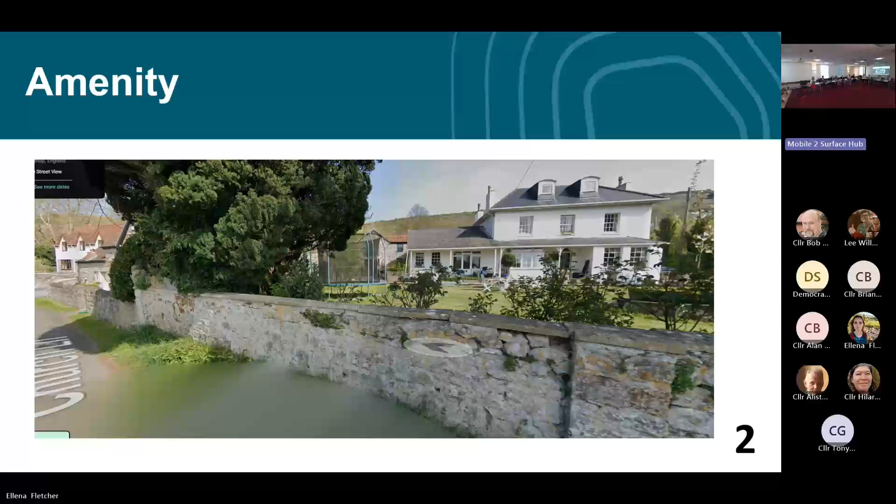And then highways and parking - there's an existing access onto Church Lane. It's a very lightly trafficked rural road. Any increased vehicle movement associated with the change is going to be minimal, not something that's going to have a significant impact on the operation of the road network, and there's sufficient parking on site to accommodate the needs of the development.

So overall, we say the scheme would enable use as either an annex or holiday let. We would consider the impacts arising are similar in nature to the lawful use, and subject to the amended wording, I'm recommending the application. Thank you.